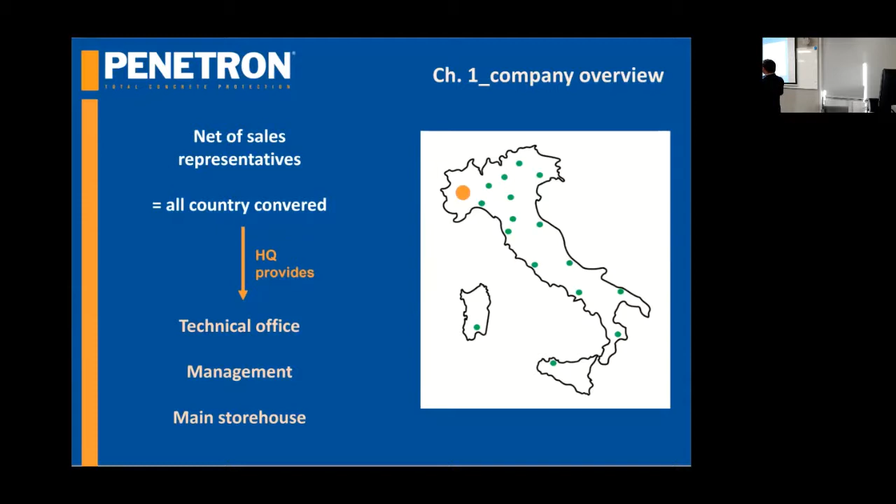Our mission is to provide solutions for concrete, concerning both waterproofing and increasing building life cycle. Our main customers, so you can focus a bit on the market, are building companies, concrete plants, and engineering studios.

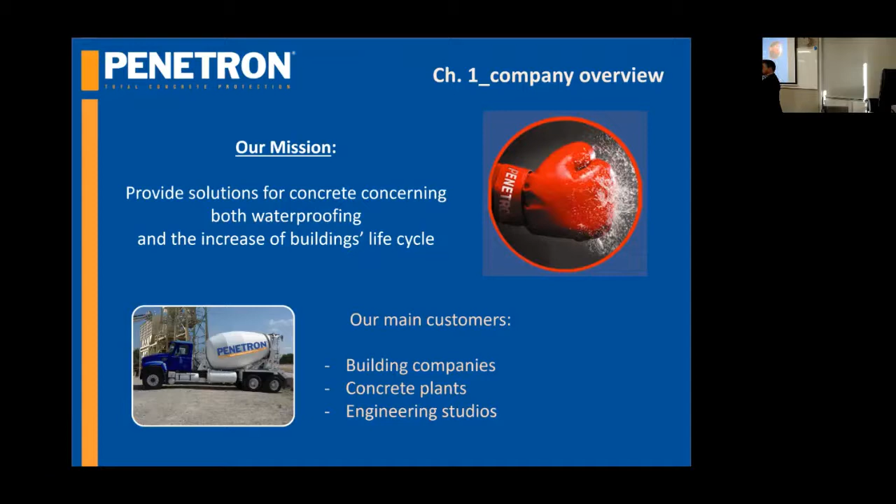This is something I want to put my attention on. I want to ask you to stop thinking as researchers and just take it as a joke - imagine that you are one of my customers: building companies, concrete plants, and engineering studios. To better understand what I'm explaining, it's important to focus on what these companies think about when considering using a new material, a new application.

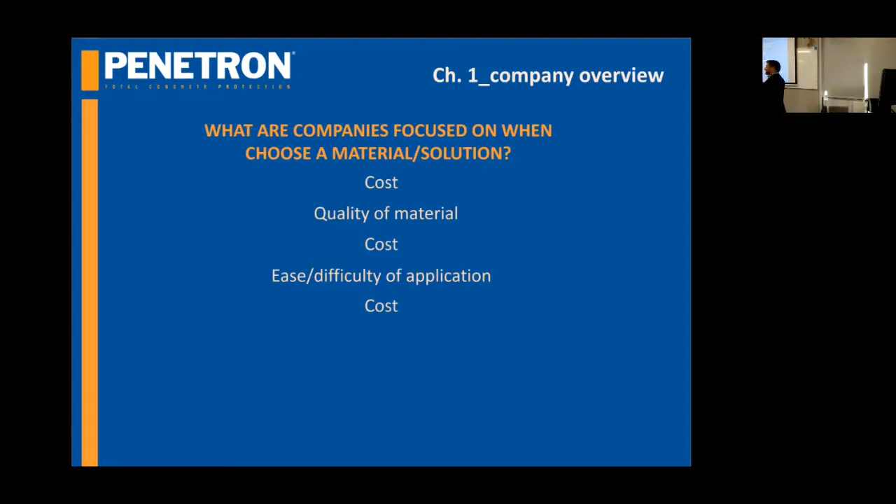They think about cost, of course, and the quality of material - if it could work properly, even the costs are important. The ease or difficulty of application, whether it requires special manpower or normal manpower, that means cost. The application time is very important, so for a company, for a concrete plant, time is a very important estimation, so it's also cost. The environmental impact, this is a sort of new way of thinking.

We are always thinking about companies, and companies are starting to approach the environmental impact of a product - that means cost too. This is just to let you feel how a product could be of superior quality, but still needs to face all of these values. You have to imagine that every company considers these things.

Chapter 2 is the Penetron Admix. I like to continue my overview because Penetron Admix is the most studied product we sell, and I want to explain it in a market view way.

The crystalline admixture appears as a powder, and its dosage is 1% of the cement for concrete, 3% for mortar. The package comes in bags or cans, and it's added directly at concrete plants.

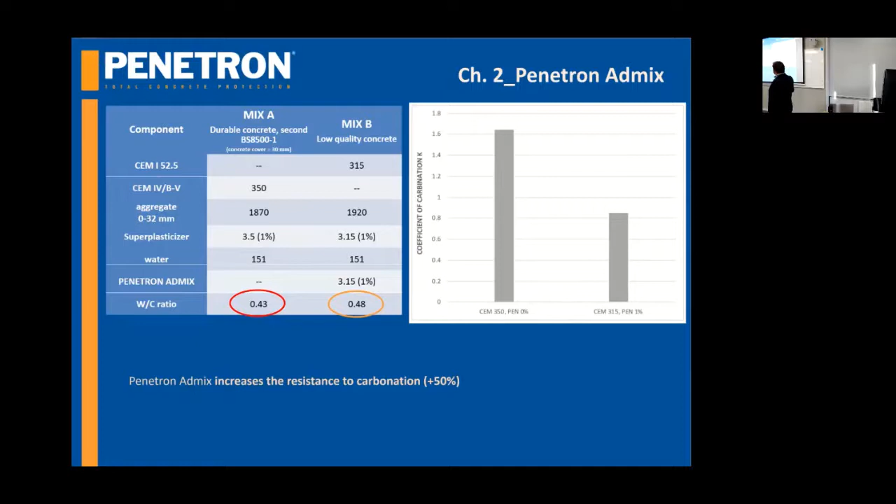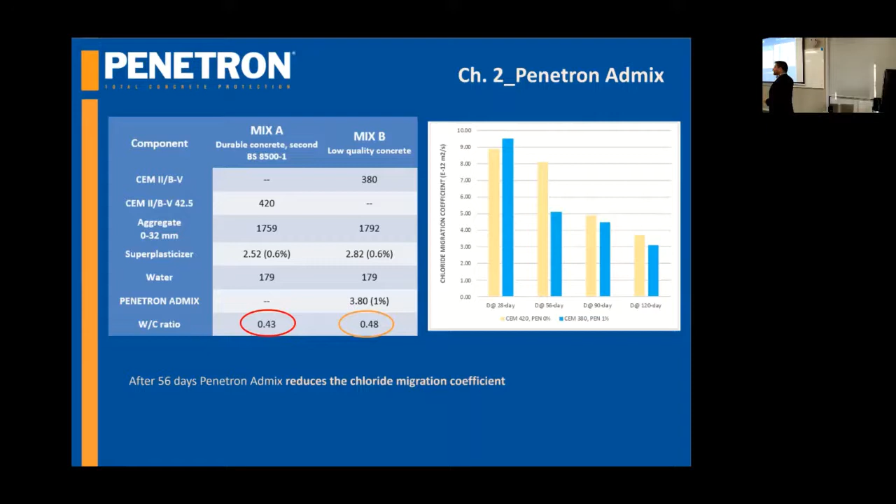A concrete with a higher water-cement ratio is considered worse compared with a concrete with a lower ratio, which has superior performance. For industries and companies, this is very important because you can use a mix design with apparently lower quality, and with Penetron Admix you can raise up the properties.

Penetron Admix has a lot of certifications concerning the quality of the product and also the environmental impact. This is very important because there are advantages if you use a product that is certified.

The white tank is Penetron Admix put in a typical working appliance. With the white tank, we make a step beyond the black tank. Black tank is all the systems that need to do something to cover and achieve waterproofing for the structure, for example a membrane. The white tank is another system based on using a crystalline admixture to make the concrete waterproof, but you have to add some accessories to prevent water from passing through the joints.

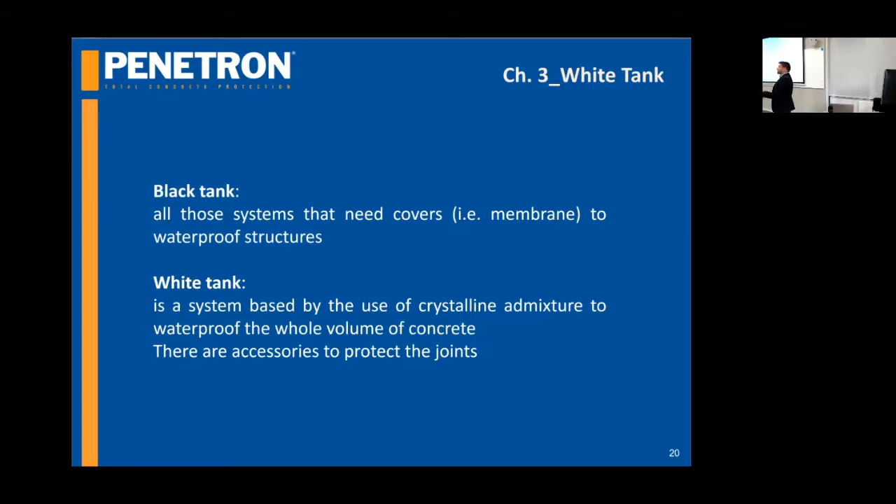The joints - I will explain just a few of them to make you better understand. The foundation wall joint is the first one. If we pour concrete on the foundation and on the walls with Penetron Admix, the concrete is waterproof, but we need to seal the joint between them. We use steel bars, steel plates with a water stop joint, either expansive, made of bentonite, and sealant.

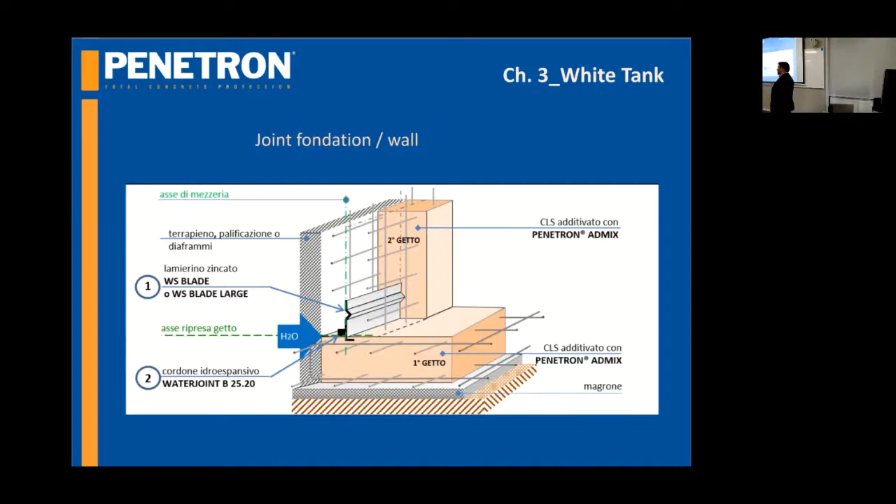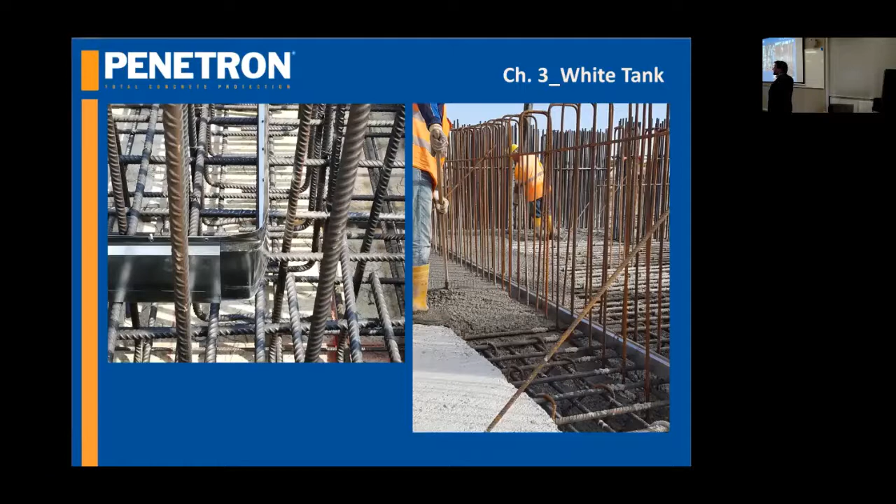This is a typical application. This is the steel plate directly on the embedded steel, and after pouring we get a result like this - a mechanical barrier that links the foundation with the wall. This green water is a tracer inside Penetron Admix, and it's one of the first ways to verify on site that Penetron Admix is used in the concrete. This is how the bentonite hydro-expansive cord is used.

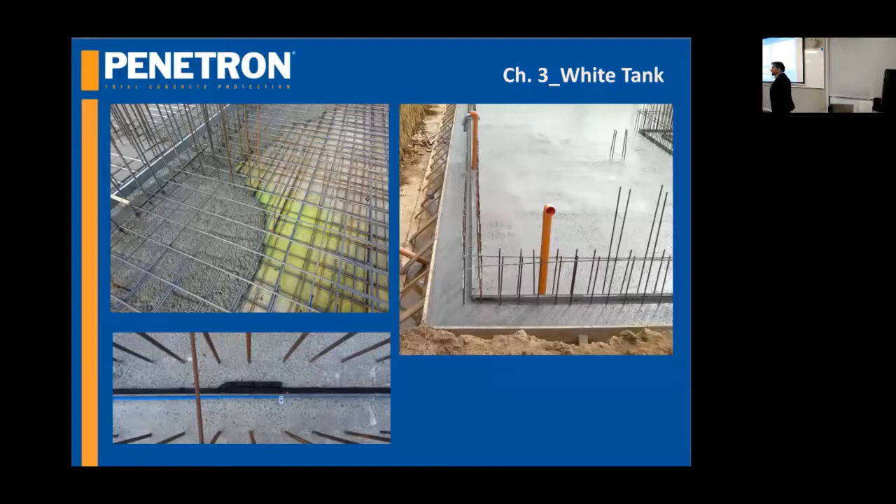Another important thing is to avoid concrete cracking. Well, concrete is prone to crack - it's one of its properties. What we do is let it crack where we want.

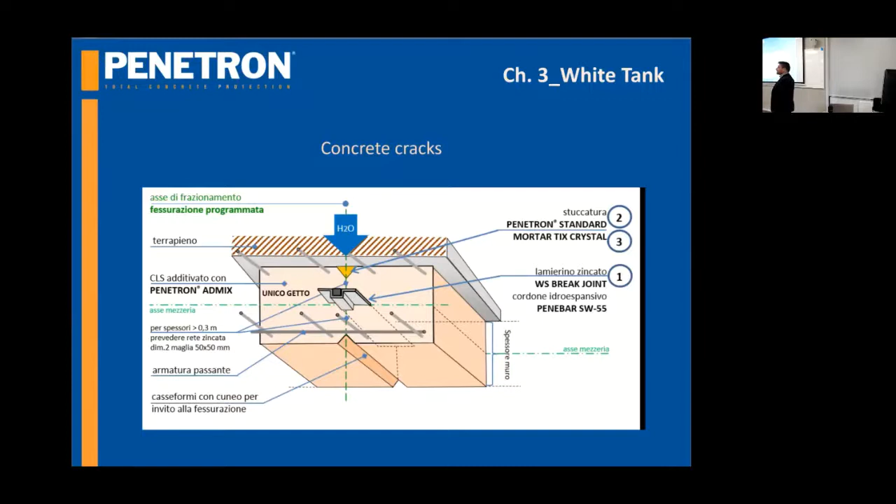So if we have a wall, we put a steel bar with the hydro-expansive material, and we make a small reduction of the wall's section, so that a crack will appear at this position, with the steel bar acting as a barrier. We can see it before pouring the concrete into the wall, and then inside we have a crack, a through-crack, but it's blocked by the steel bar, and then we close it with mortar for better security.

The same applies when we start pouring and then interrupt it to continue on another wall. There's a double steel plate, with half on the first pour and the other half on the second one. It's something like this - you can see this part has already been poured, and the other one not yet.

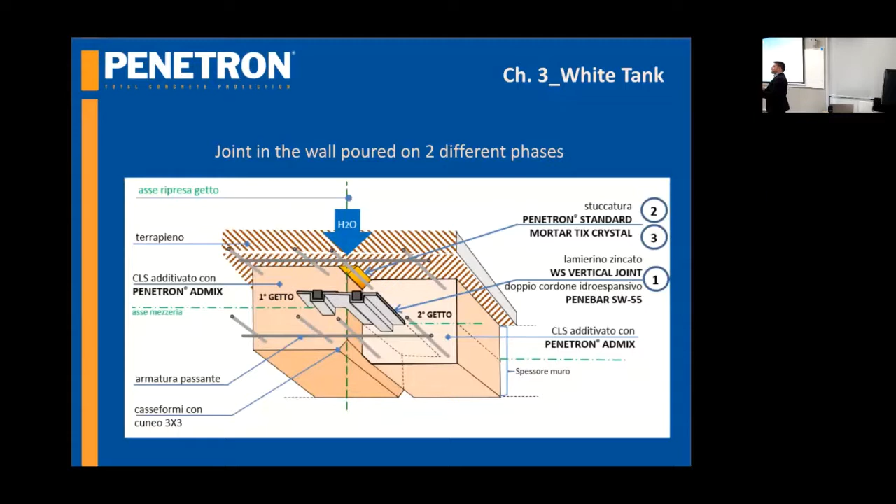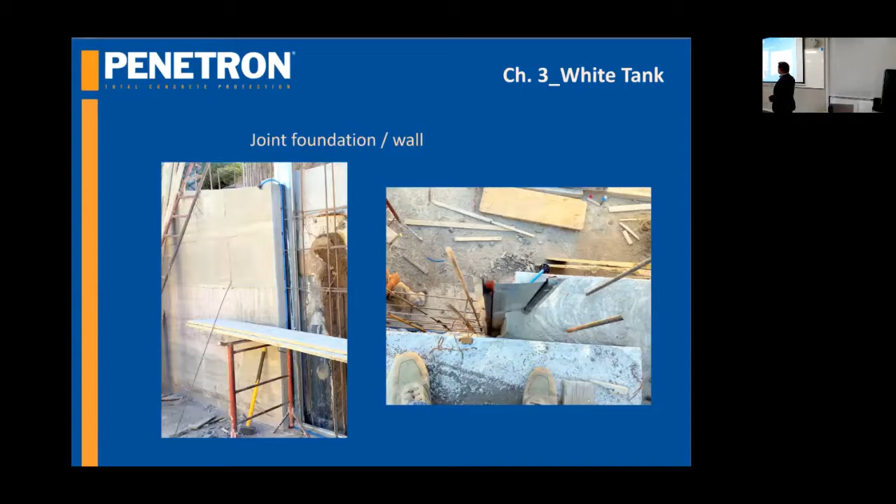These tubes are micro-cut with laser, and we get this shutter to be used in the future to inject polyurethane resin that expands and seals the joint.

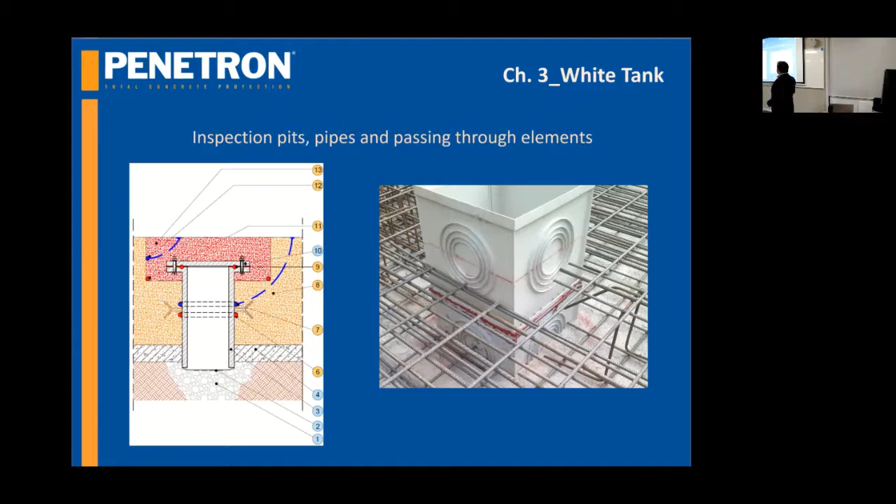Another important thing to deal with are inspection pits, pipes, or all elements passing through walls or foundations, because they create a direct link from the outside to the inside. We use a polyurethane hydro-expansive paste that expands with water, something like this. There are a lot of photos because I think photography better explains how things work on site.

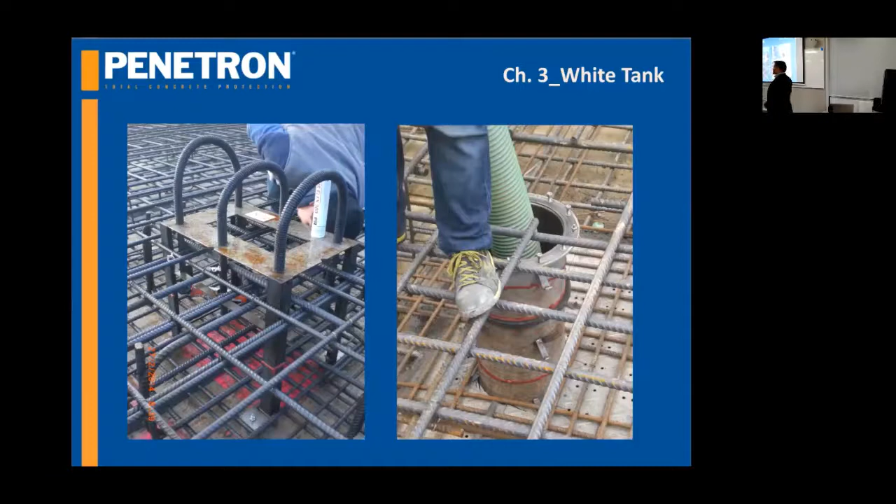So we need to imagine we are a drop of water - where can I pass? When you start closing all the ways, you can be sure you've done a good job. If you forget about something, you will have problems for sure.

Then we have a check with the mix design. We have an important relationship with concrete plants that provide their mix design to check if Penetron Admix could be applied, in what quantities, and about the dosage.

One of the main important things is on-site assistance, because we have to work with companies that are not accustomed to using our products, not used to using a white tank solution, since the traditional approach is something like a membrane.

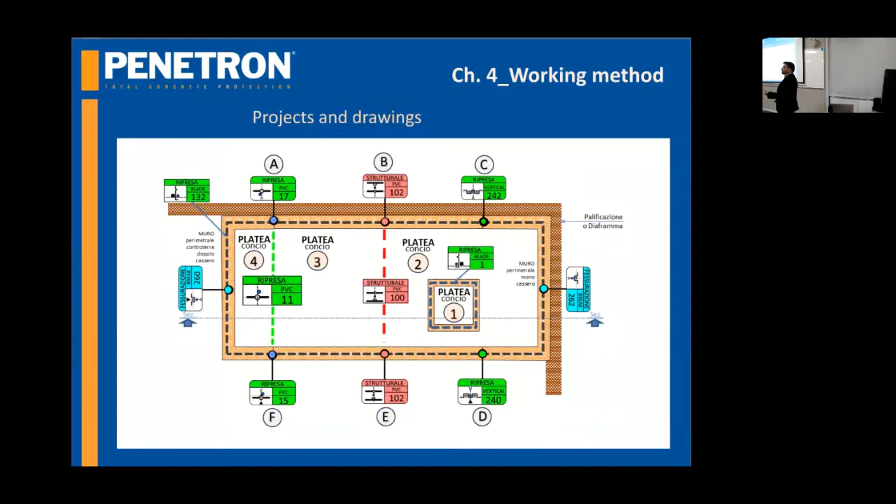Our projects and drawings are quite difficult at first sight, but it's very simple. There are some different positions for the joint I explained to you before, and we make it as a drawing on the section of plant, so that the final result is something like this.

We got a legend with all the positions of the steel bars and the joints, and it's everything reported on the drawing, so that on site this is very useful because color is quite easy to read, because a lot of time people on site don't spend so much time into this part.

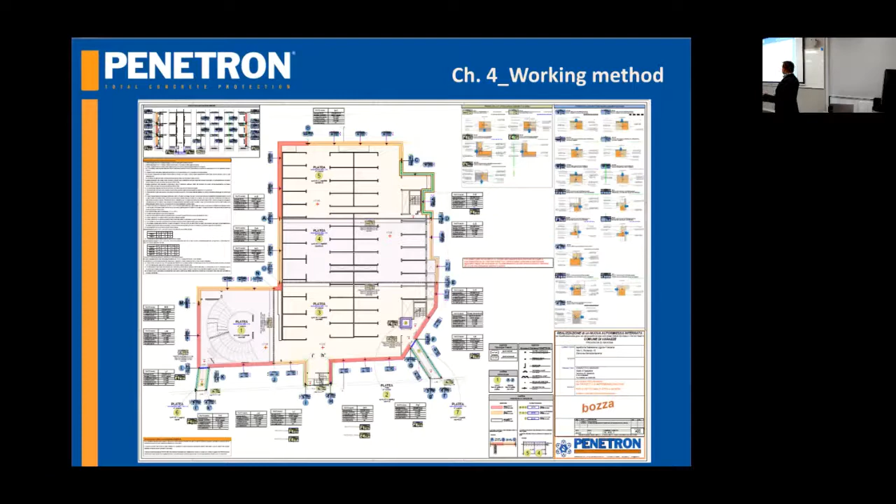So there is a role of on-site assistance to prevent errors and to make things run well. And if there are some problems or questions, they got a referee or someone to ask. But there is also this table that could be useful.

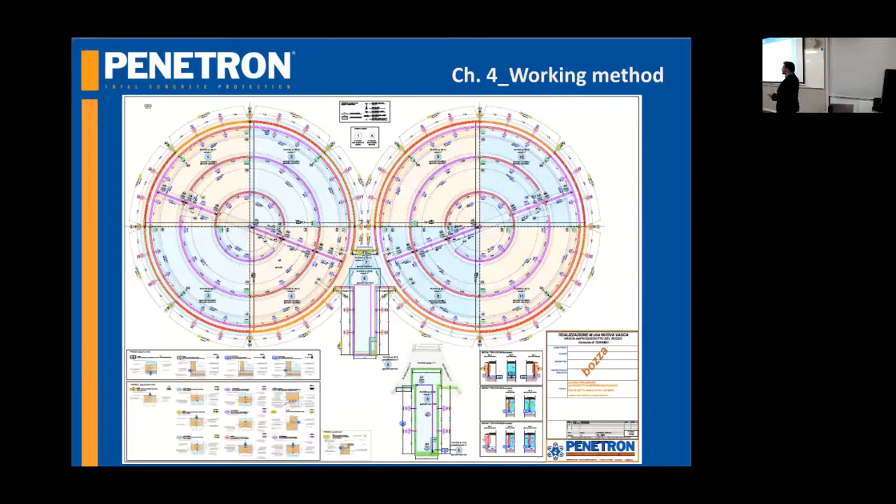This is a particular one. This is our wastewater plant, and it was quite complicated, but with these drawings it could be easier. We make also some specific details and particulars if needed, if they are required, and the on-site reports.

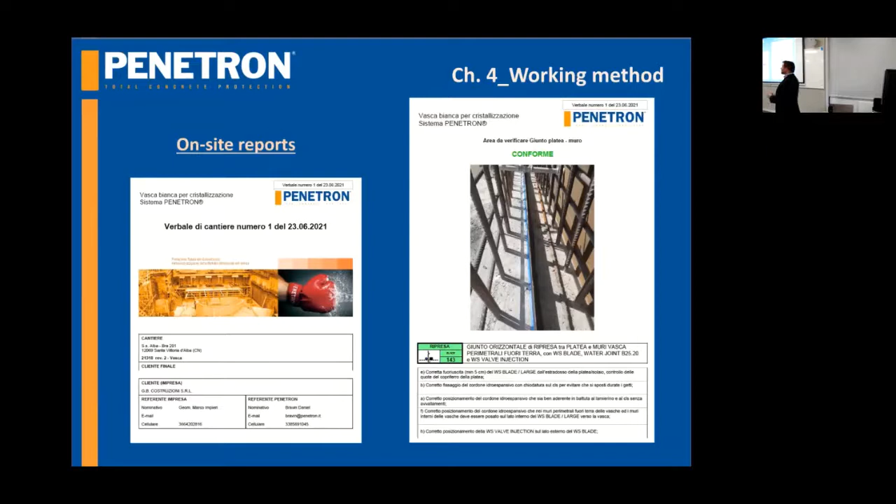The better way to make things go well is to have a good relationship with the building company. And the better way is to make reports, to check frequently how things are going, and to say it's okay, or if there's something that doesn't go well.

In this case, I don't know if it's something difficult, but these are bars on the foundation, and they are directly linked with the magrone. So they pass completely through the foundation. This was a big problem because water could pass through them.

So I checked them, I talked with the company, thinking of me not as a policeman or someone that has to check and control it, but something like an assistant, someone that could help with your responsibility. And they just put the hydro expansive band here, just to cover and to prevent water from passing through the foundation.

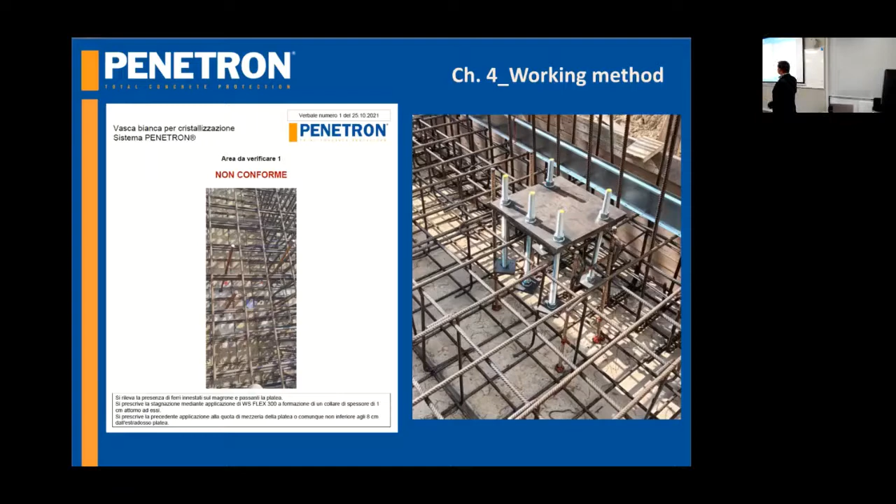Building: this is a tunnel track that links two buildings of Pirelli, the tire company. It is near Turin. This was a site with micropiles, and we were in the condition of aquifer. So there were well points that drain the water to let the company work safe and good.

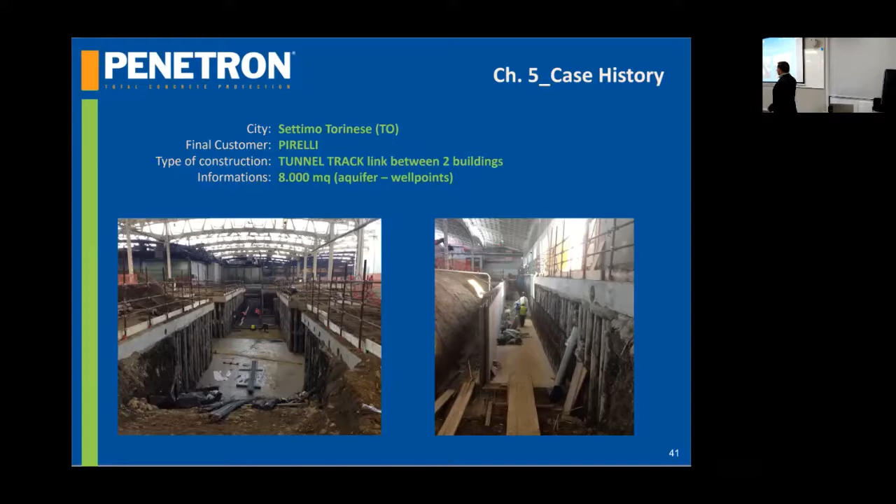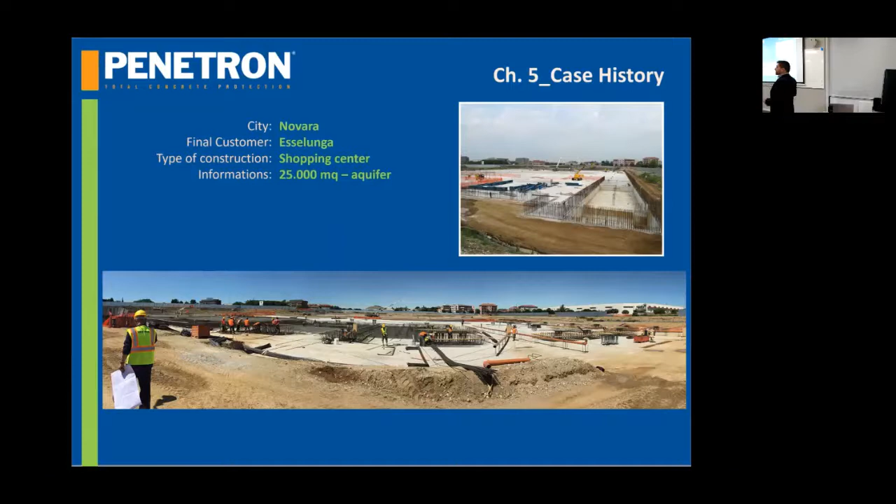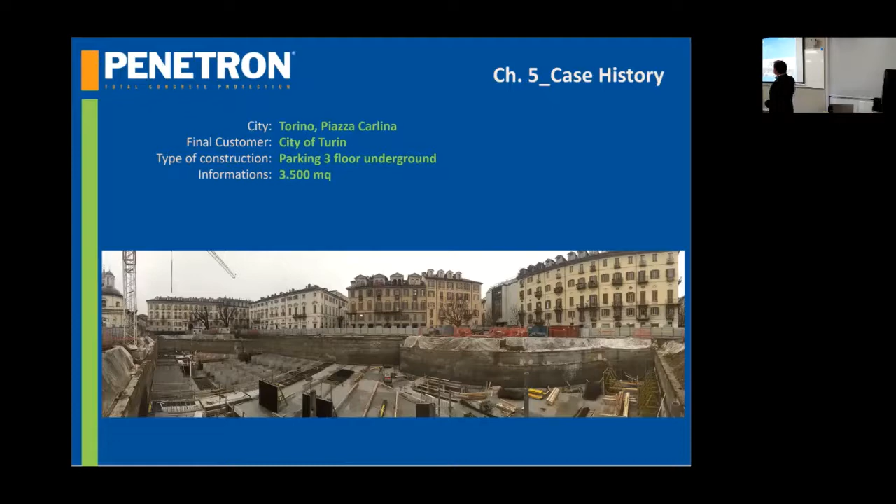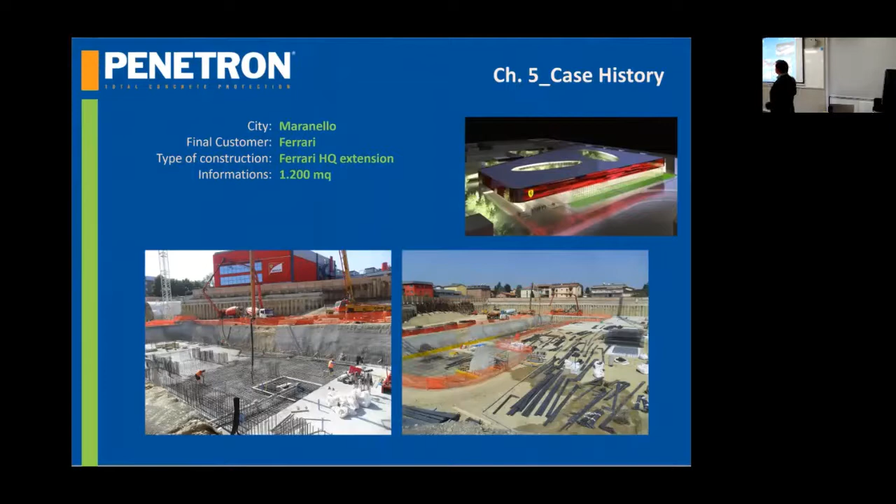With Penetron, there is not this difficulty, because it couldn't be damaged. It's inside the concrete.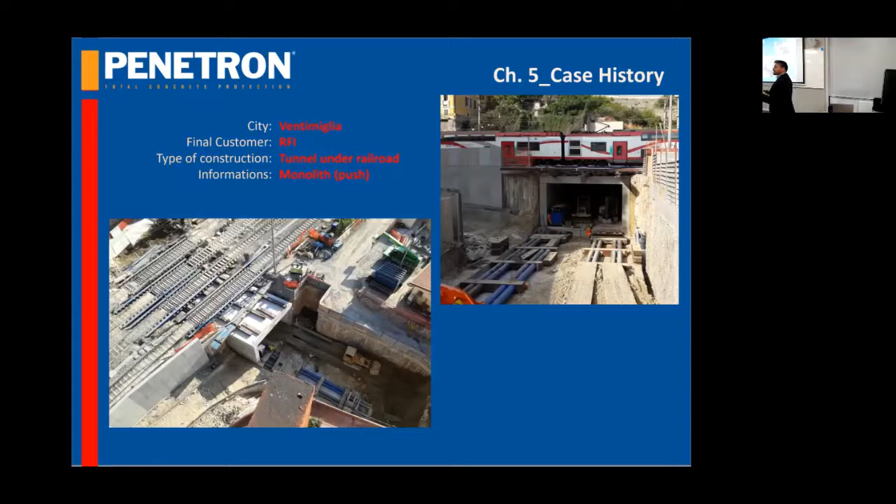This is one of my favorites. Unfortunately, it was not one of my customers. This is a neighbor in Ventimiglia.

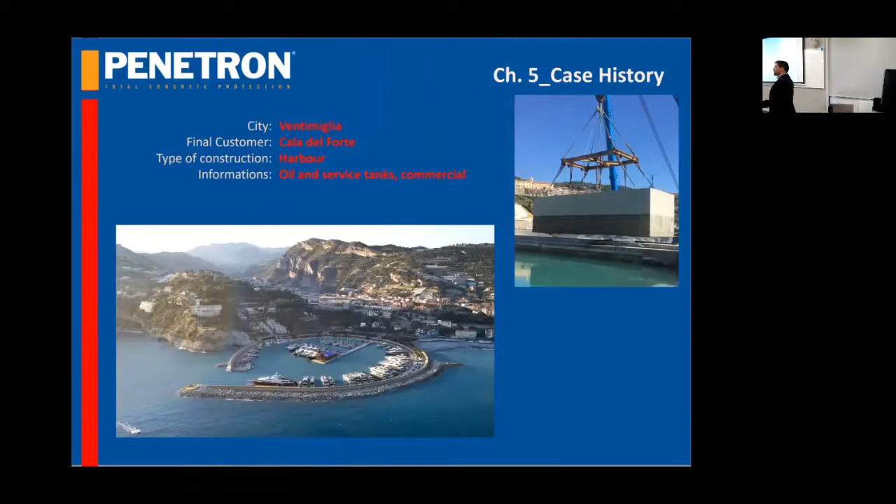Here we did some commercial buildings and some tanks needed for different services: oil, wastewater, not salt water. We built these tanks, and they will be placed directly in the sea. This is seawater, salty water, and this contained not salty water. So it was very important that the system works properly.

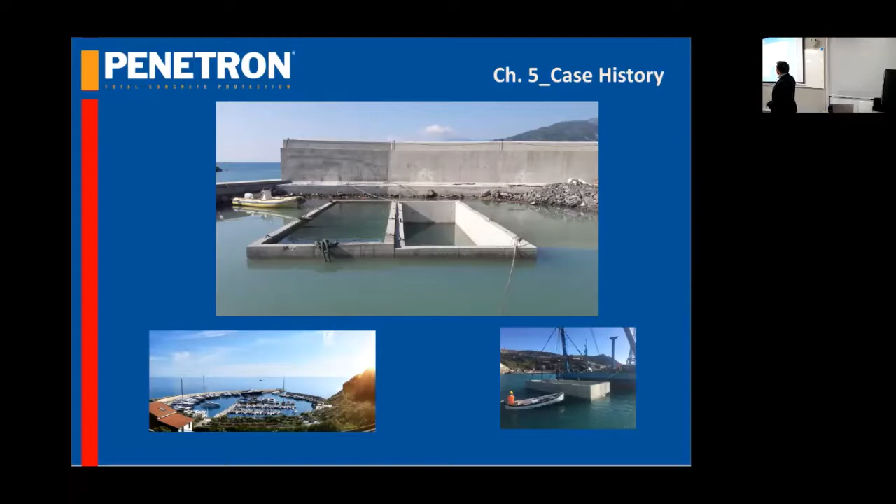There were some tanks with oil inside, some others with machines, and this is how Penetron works. I'm very proud of this work.

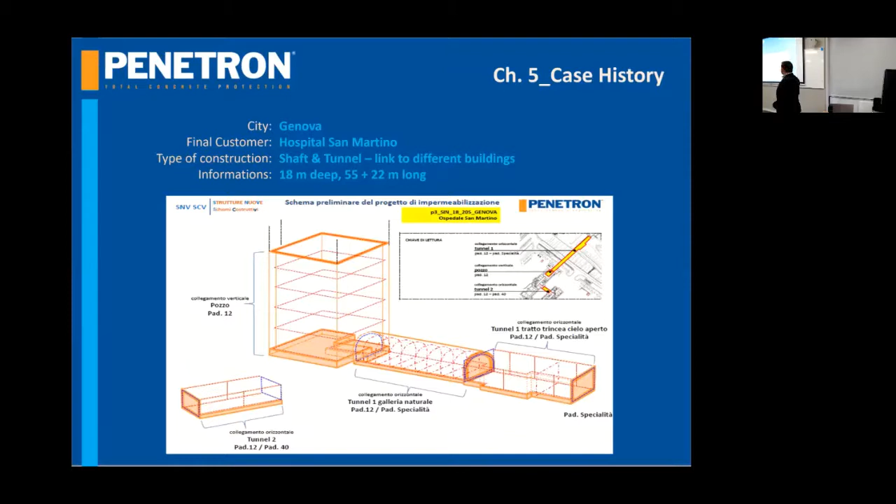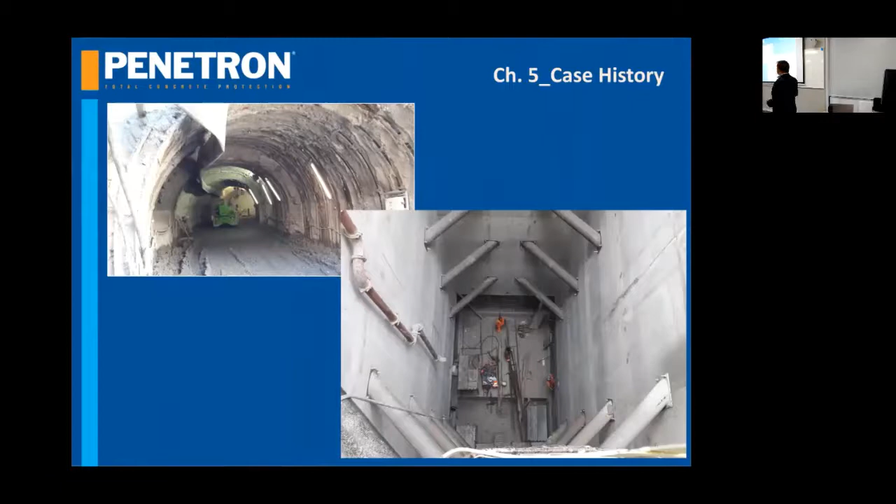For healthcare, this is an example of a shaft and tunnel that links the Hospital San Martino with some other buildings and areas of the hospital. It is a shaft of 18 meters, and two tunnels linking the structures, 55 and 22 meters long. We did this in this way, built top down, starting from the top and going step by step downside. It is a more difficult solution.

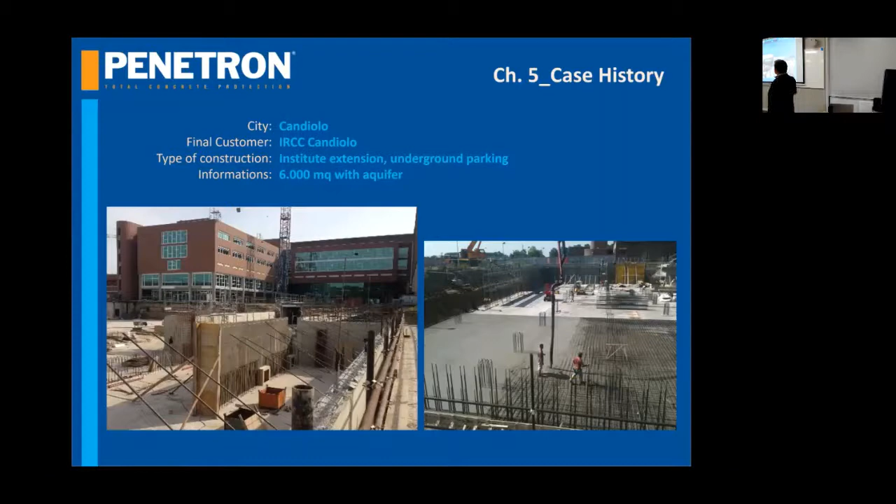This is another example for healthcare. This is IRCC, an institute for research and cure against cancer in Candiolo, near Turin. This was an extension of the research lab and the parkings. In this case, there is an aquifer, and the company decided on this project something like 8 years ago. Nowadays the company started a new extension and chose us again. So in these days, I'm visiting them to prevent against problems.

Another product is Penetron standard, and now we are going to approach the repair and the technology for infrastructure. Penetron Admix fundamentally is for new structures, while Penetron Admix is an admixture to be added to the concrete or to mortar. Penetron standard is a slurry to be applied on concrete, and it penetrates inside.

The more water there is, the more it reacts and it works. It's not a coating, it's not something you apply and if you remove it, it will still work. It will still work in the future if removed. Applying the slurry seals all the cracks up to 0.4 millimeters.

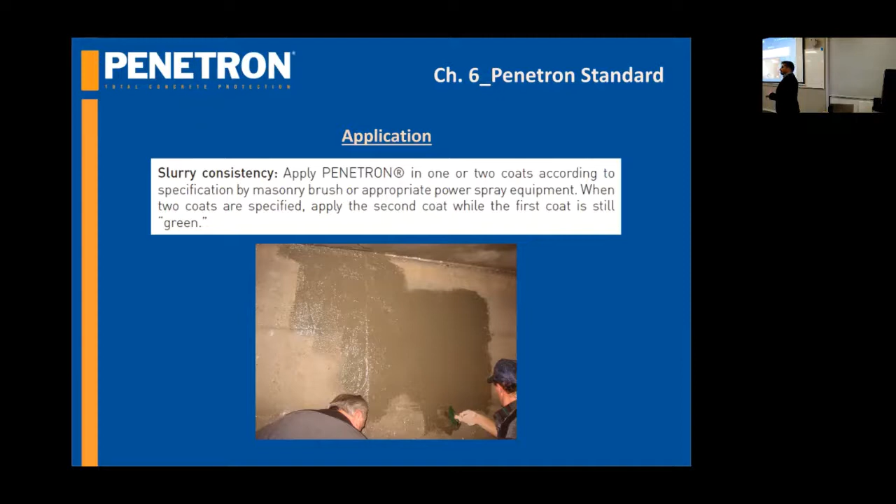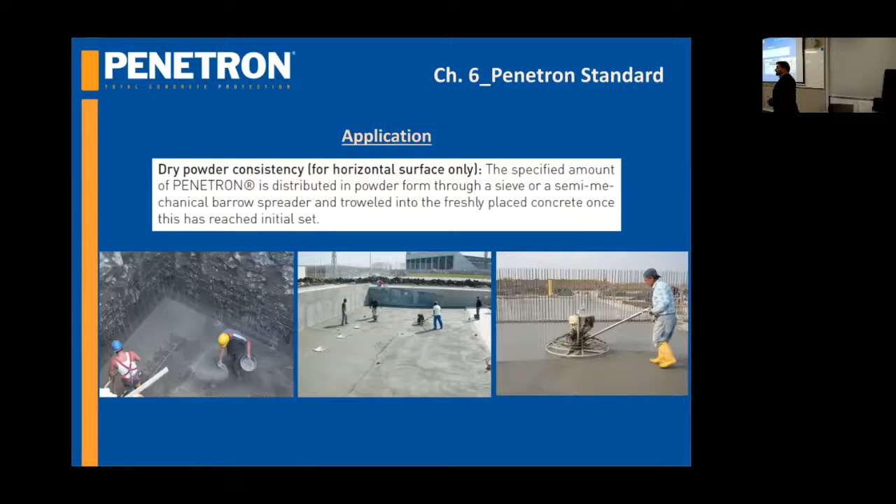There is another application for Penetron standard, for new concrete, only for horizontal surfaces, and it gives a sort of coating to protect concrete, for example against chemical aggressivity, chemical attack. But I will show you better.

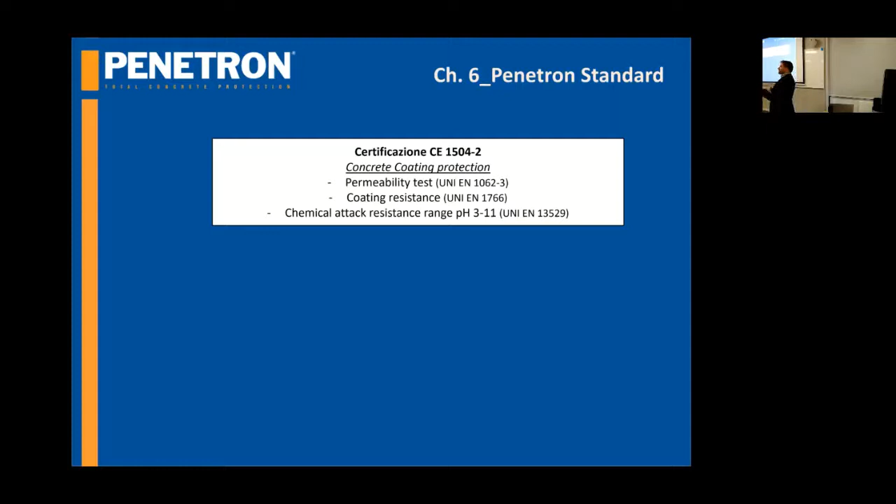A lot of certification concerns concrete coating protection, with permeability tests, coating resistance, and chemical attack resistance in a range of pH from 3 to 11. So for example, in a wastewater basin, where the water has an aggressive pH, this could be used to prevent the concrete from being damaged.

Another certification is for structural and non-structural repair: compression strength, adhesive bond, and carbonation resistance. The other certification concerns protection against corrosion of embedded steel, so protection against chloride and so forth.

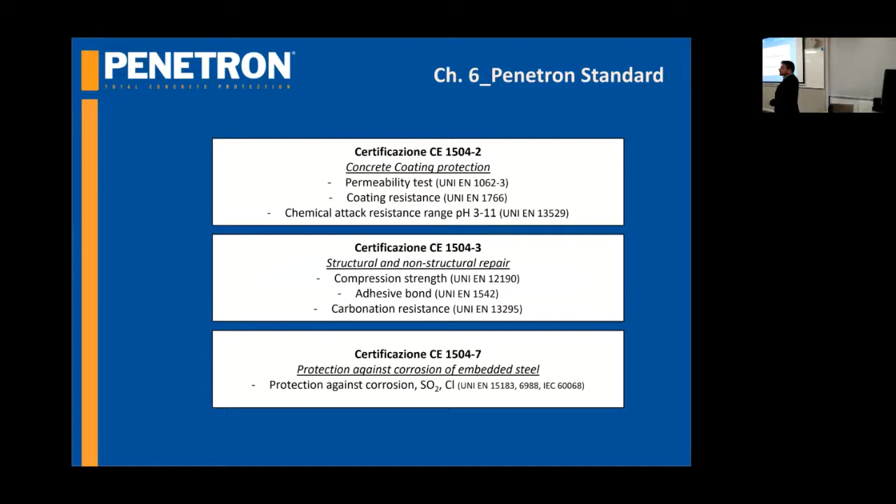Pull-off test. Why is this important? Because talking about the adhesive bond, one of the main problems when making a repair is to be sure that the mortar or material you are using can bond with all the support.

The pull-off test we did was a pH aggressive test, and we saw that after 28 days we got this value for different pH values, from acid to basic. After 90 days, the adhesive tension was higher. So the more time Penetron has to work, the stronger it becomes—the adhesive bondage is stronger.

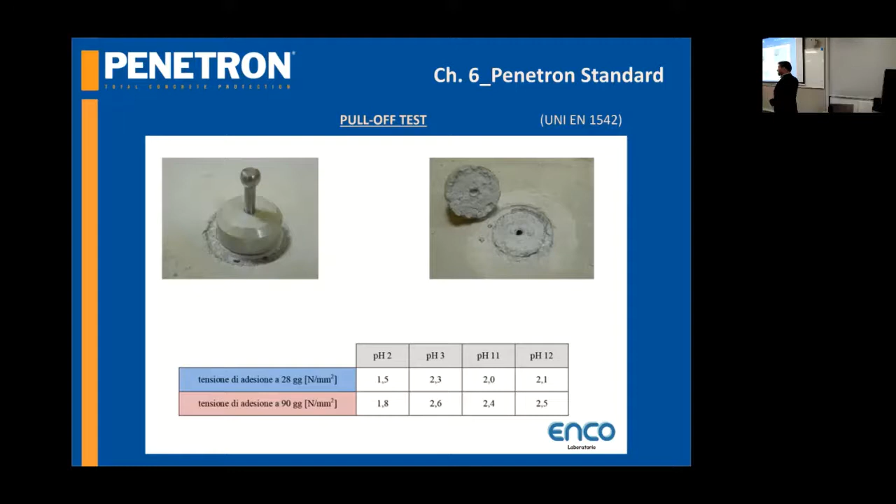Because of this, we use it as a primer. If I have to make a repair on concrete without Penetron, we use it as a layer to make a bond between the concrete and the mortar I'm using on the support of concrete.

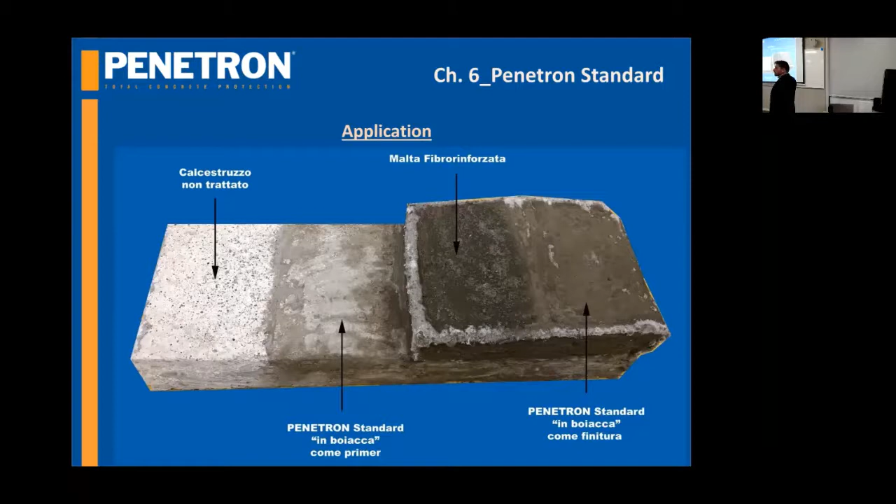This is a typical application of a repair. Here is an imperfection, could be a crack, could be a little vacuum. We have to remove it, clean it well, use Penetron standard as a primer, then apply a mortar, and again Penetron standard as a coating.

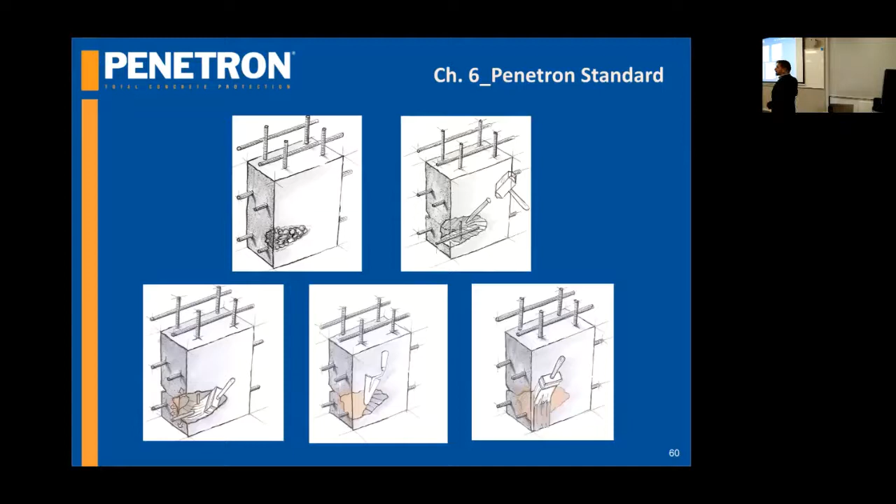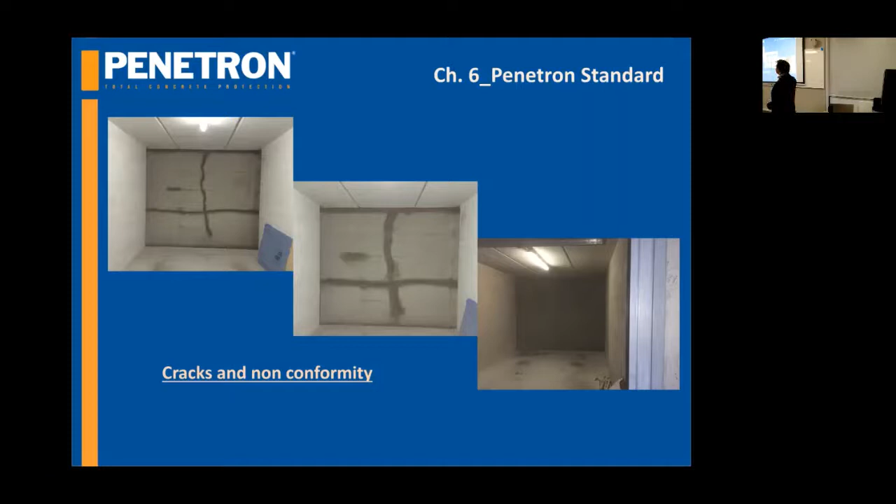These are typical applications. This is simply a box with a problem of water coming in from the outside. There was a crack and a little vacuum, and that has been sealed.

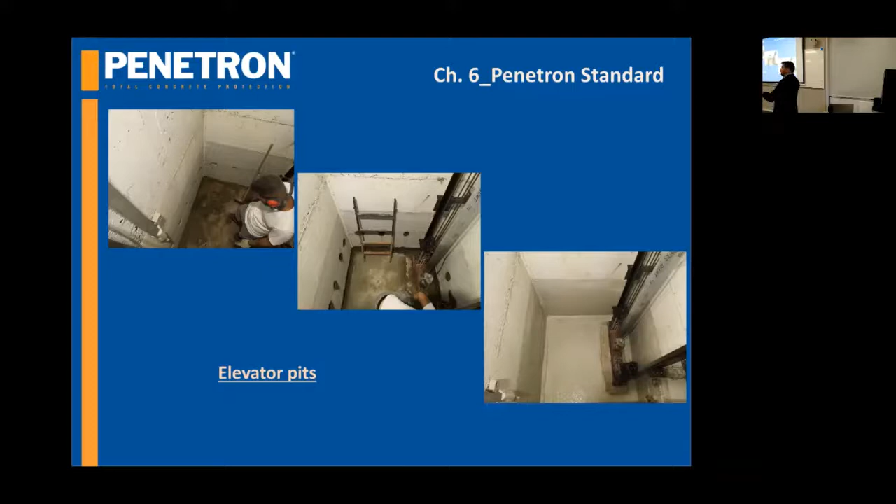This is an elevator pit. Elevator pits have a lot of problems because they're typically the lowest part of a building. If water found a way, water is lazy, it found the easiest way to pass. Elevator pits are something like a highway for water. In this case, it has been repaired, especially the joint between the foundation of the pit and the wall.

Another application is for canals.

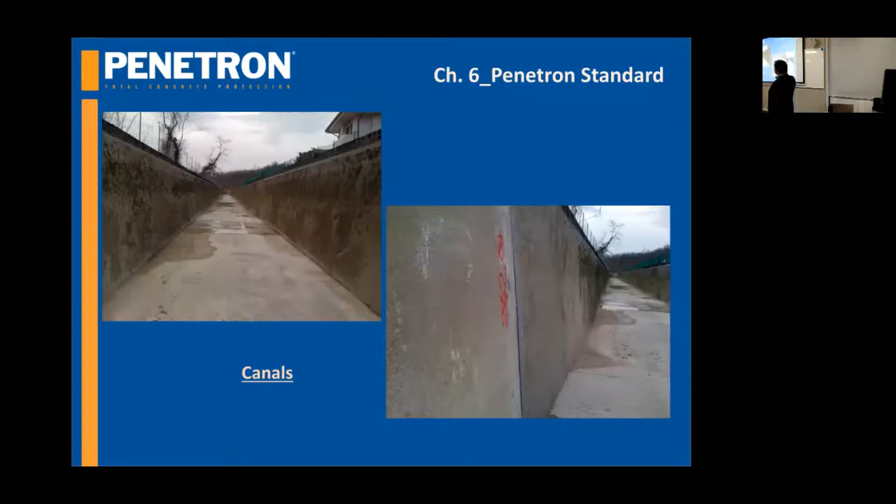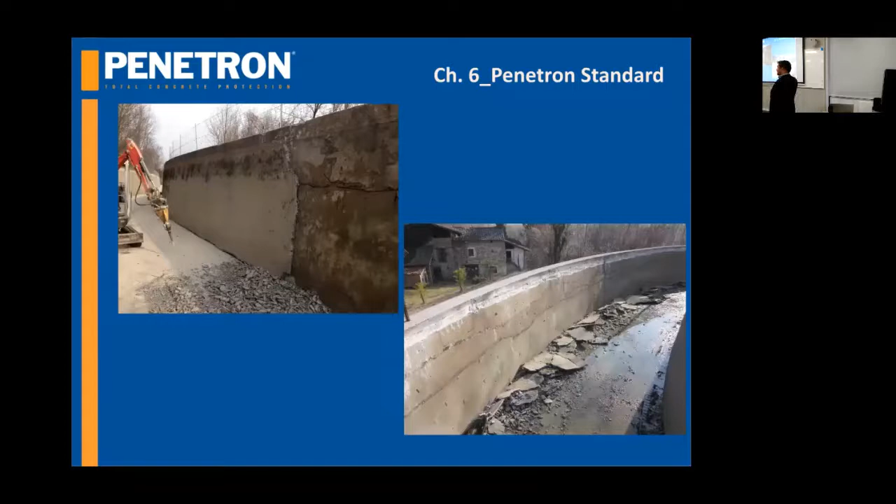In this case, the canals had an old coating that was damaged. First thing, remove it, and we have to reach the original concrete. After that, all the cracks were repaired, and the solution chosen was to use Penetron, not applied by brush because it was too expensive in terms of time. So we decided to spray it with a machine that could do this.

Here it is, the Penetron standard slurry applied with the painting machine. This is how Penetron started to react. Where you see the white parts is where Penetron is working. The more white it is, the more reaction it has started. This is the difference between before and after. This is quite typical after 8 years.

An important thing concerning canals is that the Penetron standard used as a coating is very, very smooth. So if I'm the owner of a canal, I want to reach two conditions: that water wouldn't be lost during the way, and that water runs as fast as possible, because I have to produce electricity. With Penetron, we can prevent both of these issues.

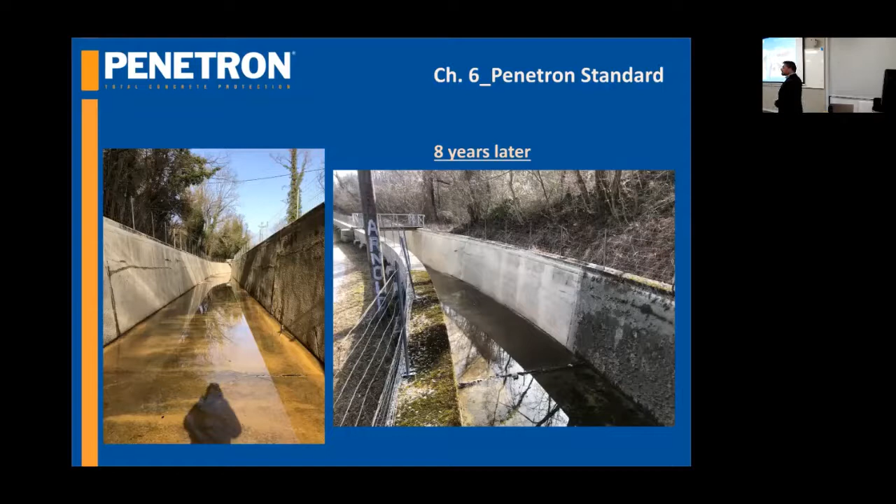Because the concrete becomes waterproof, and the smoothness is granted and reached. This is also important because there are no plants growing that are typical. You can see moss and other organisms growing on the side of the canal, which this prevents.

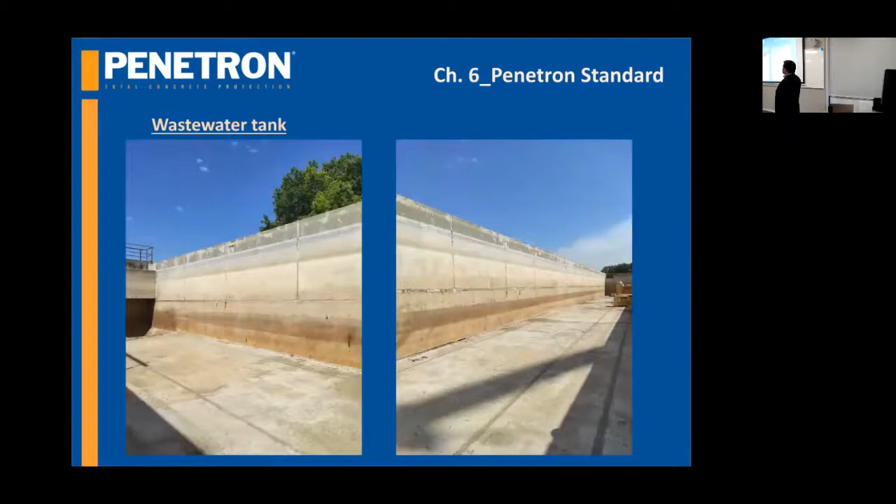This is an example for a wastewater tank. It is in our wastewater plant, a purifying pipe plant. There are also problems about the embedded steel, problems concerning corrosion.

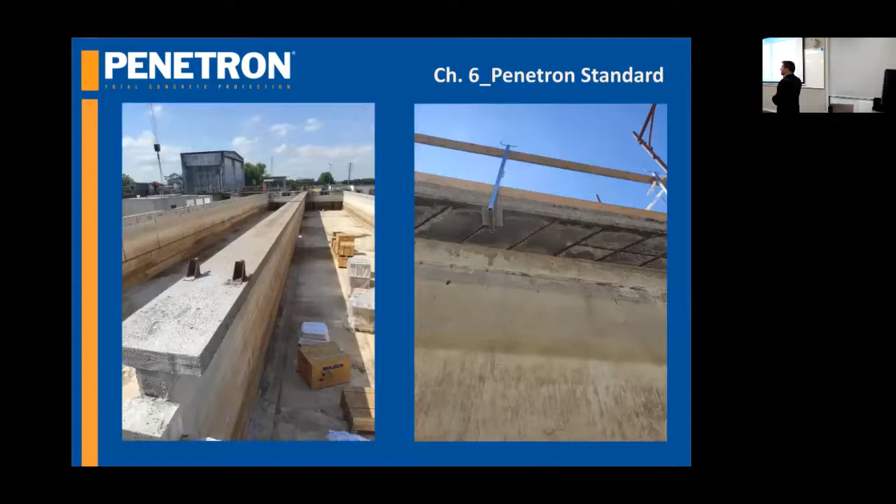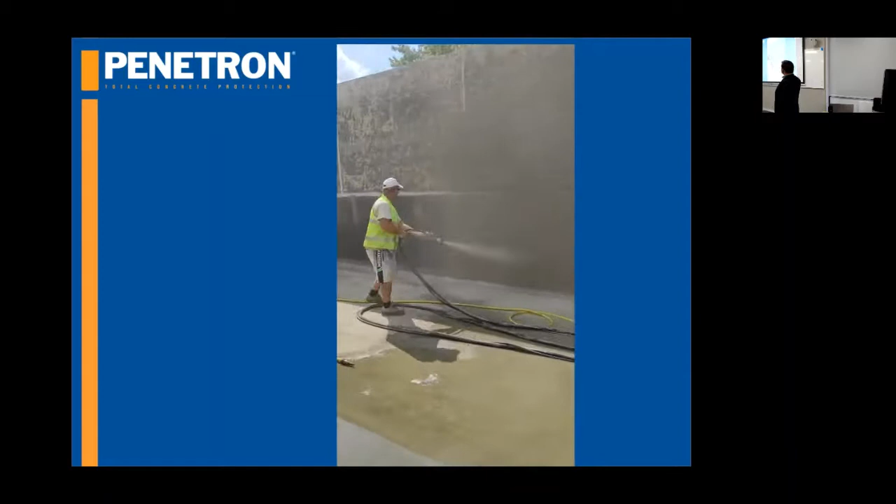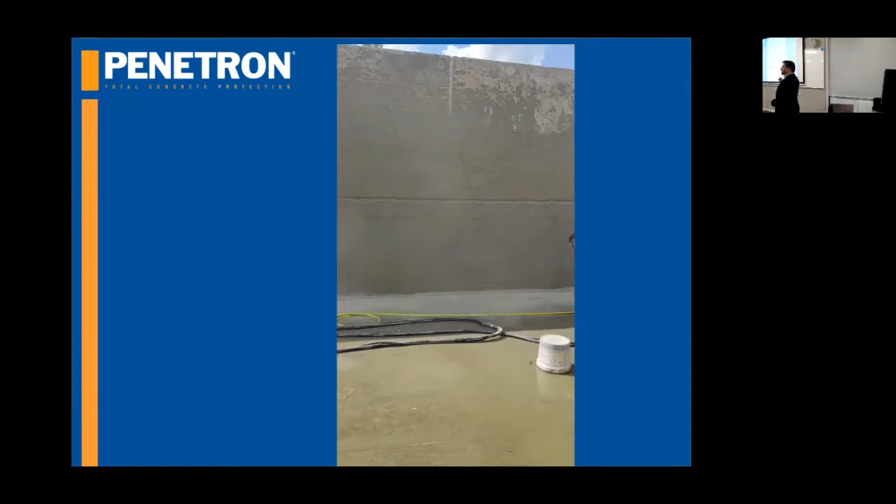These are joints that have been cured before, movement joints, because it's a very big tank. So we use an elastic paste, and then we could apply it. This is the result before and after, and this is how we repair the damaged part. You can see from this side, these are the continuation of the work.

Next chapter is concerned with Spritzbeton with Penetron Admix. Spritzbeton is an application very used in tunneling and in all conditions where you need to have a smooth surface for next workings, or maybe just to finish it.

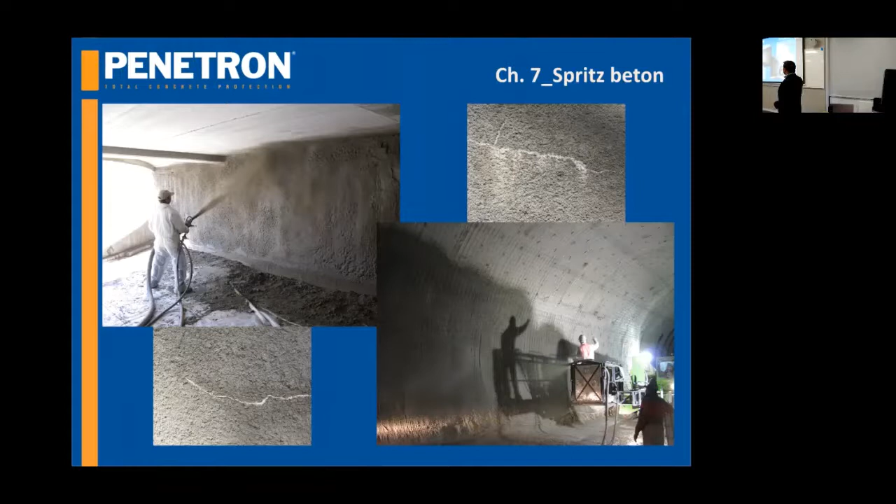For example, this is a gallery, the Paradiso site in Switzerland, and we decided to make some more tests on this site. We made a test with the concrete without Penetron, and we got a permeability of 26 millimeters. The same concrete with Penetron inside got a permeability of 17 millimeters. This means that it doesn't reach the embedded steel, and it's a very good result.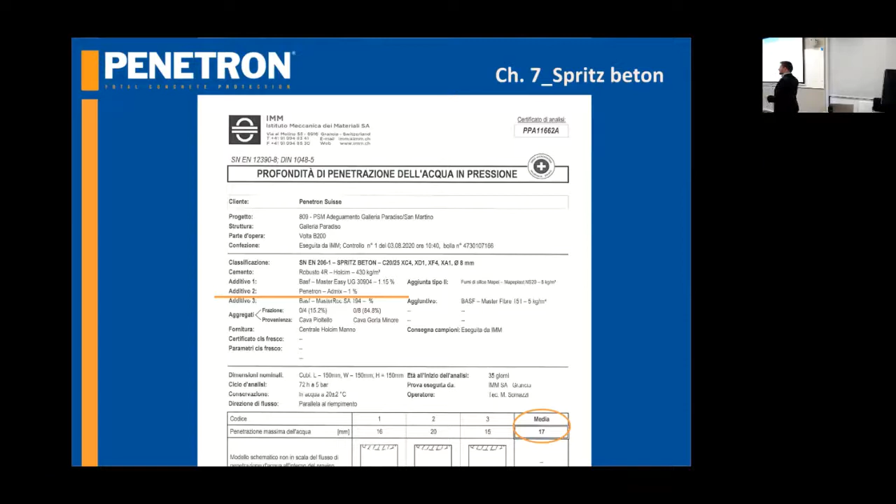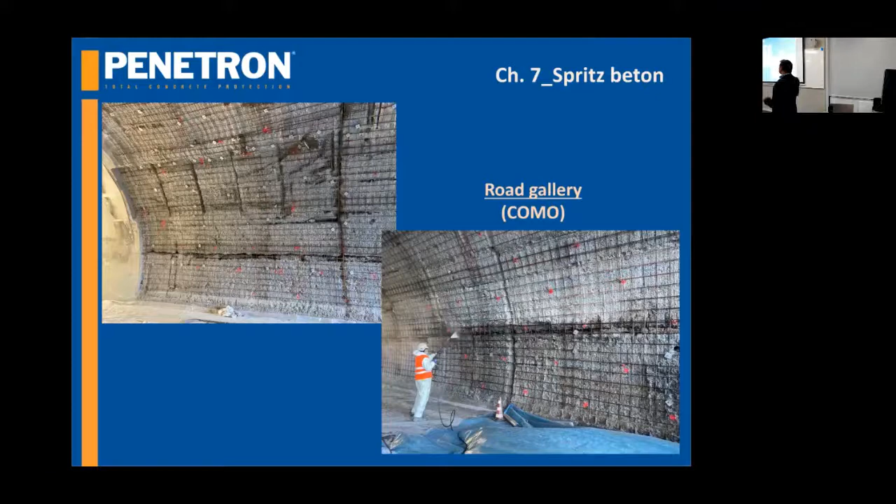This allowed lots of jobs, and in this road gallery site in Como, in the north part of Italy next to Switzerland, we used a combined technology, both with Penetron standard to prevent corrosion attacking the embedded steel, and spritz beton with Penetron Admix to cover the gallery. So first of all, we got the Penetron standard applied.

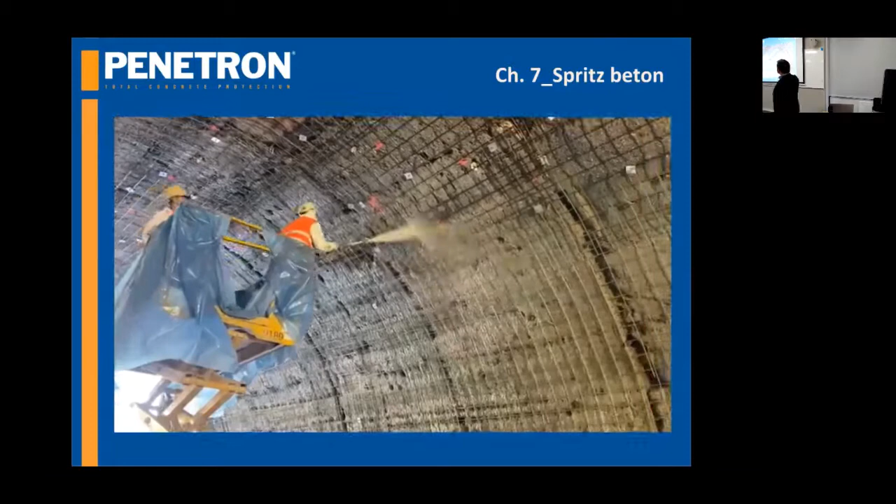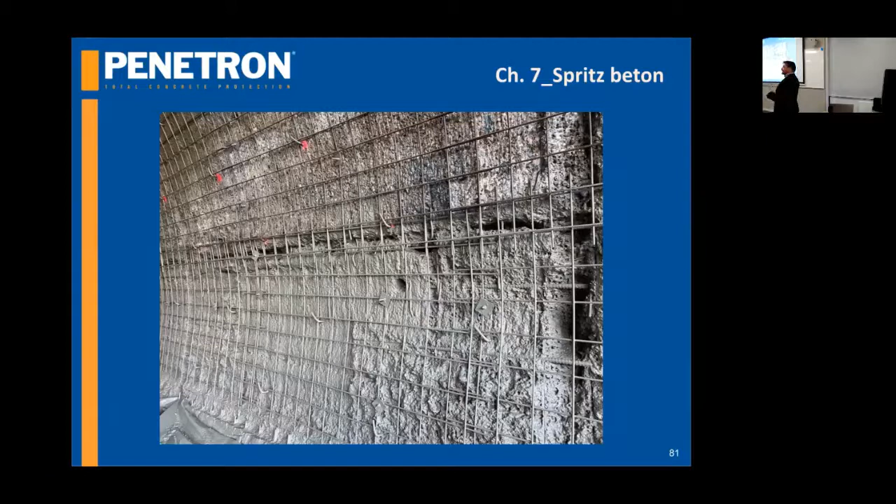Here is the video. You have to protect well because it is not good to be in it. And this allowed us to have this result. The embedded steel is protected, and the surface is ready for the bonding connection between the new Penetron spritz beton and the old concrete, and then spritz beton with Penetron is applied.

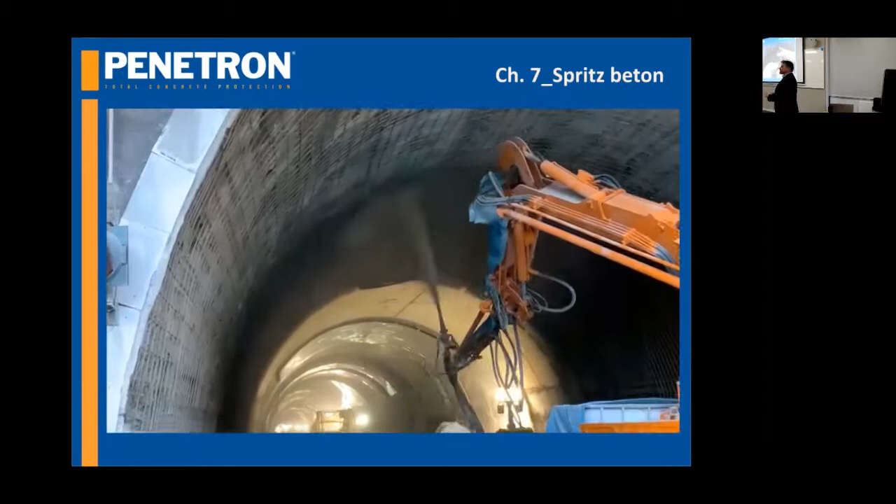This is a particular application, not an everyday solution, so it was nice to be seen. You can see also that there is little waste material. Typically, when you use spritz beton, you get a lot of waste material because some pieces fall down and it doesn't attach well. With Penetron Admix, we got very little waste material. This is another part of the application.

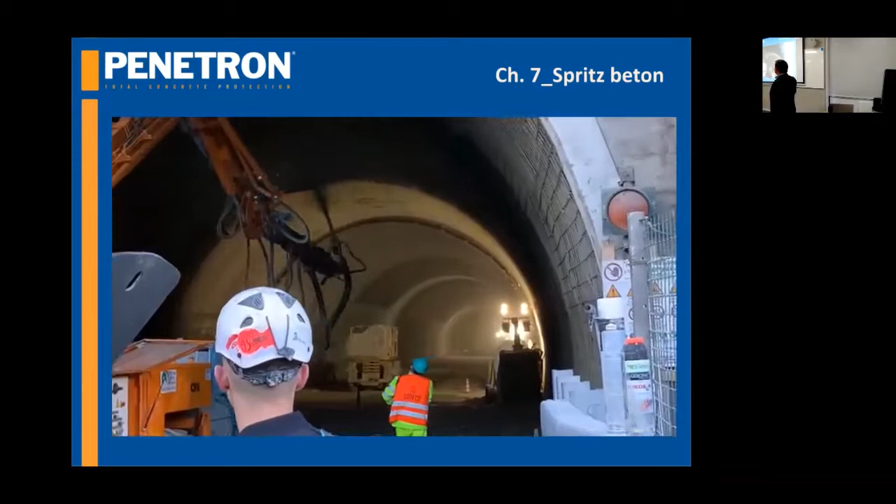Okay, what's next? Our plans for the future are surely bound with these projects, and these projects are linked with durability.

Self-healing technology - just to turn back to one of the first slides, a company is concerned with cost, with time, with the difficulty or ease of a material to be applied, and it's also concerned with durability, because if I have to build something, I don't want problems in the future. We want to help building companies furnish products that allow a long-term, long cycle life for buildings. And that's all.

Do you have any questions?

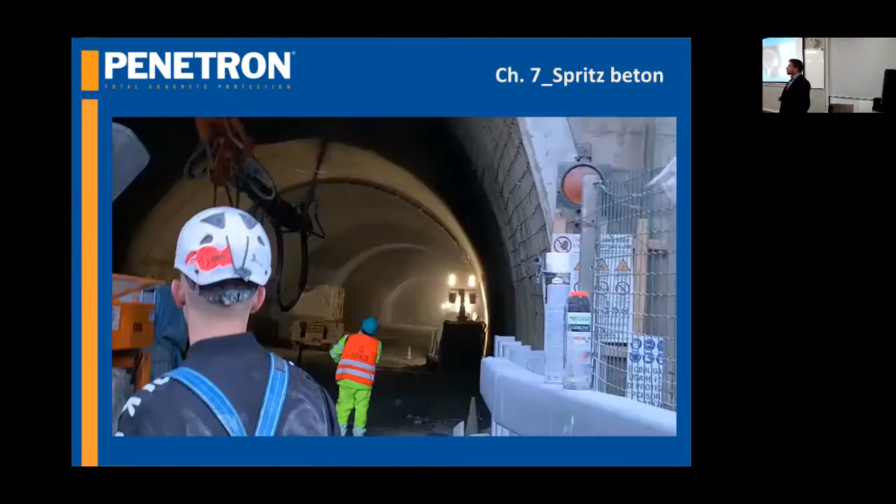We had a question from the chat, more of a comment actually. It would be good if you give us more data on water cement ratio, and on the other hand the different dose, and how these correlate together, like water cement ratio and the Penetron dose.

I'll take this one. The water cement ratio allows us to know what is the content of cement. The dosage still remains at 1% of the cement. Using a high water cement ratio with Penetron allows us to reach a better concrete that could resist better to permeability tests. So that's our way. I don't know if I answered completely your question.

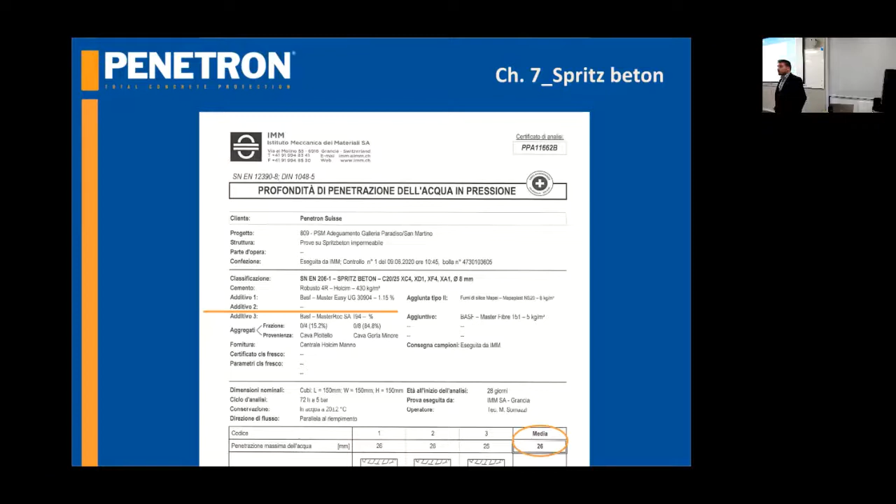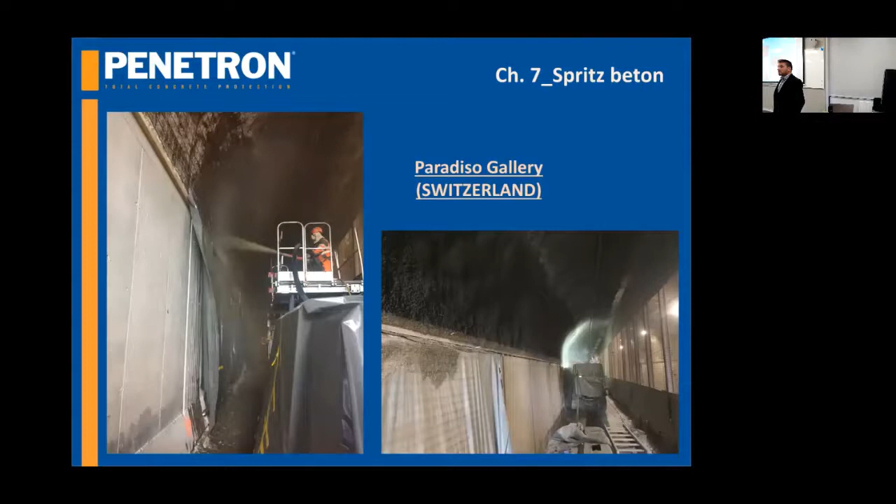More of a comment rather than a question. There's another question from the chat, similar to what we were just talking about. Do you have any recommendations for the maximum dosage of Penetron? The chat says they use a crystalline admixture for their experiments and it starts behaving like an accelerator at 4% dosage.

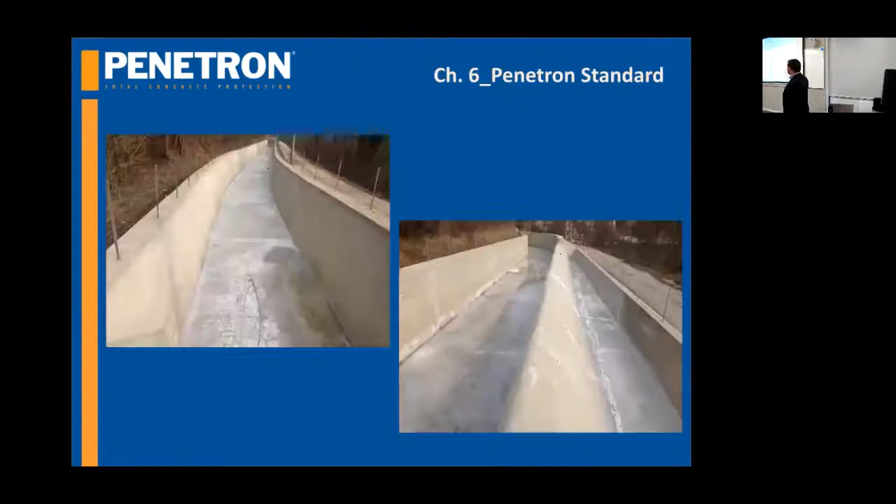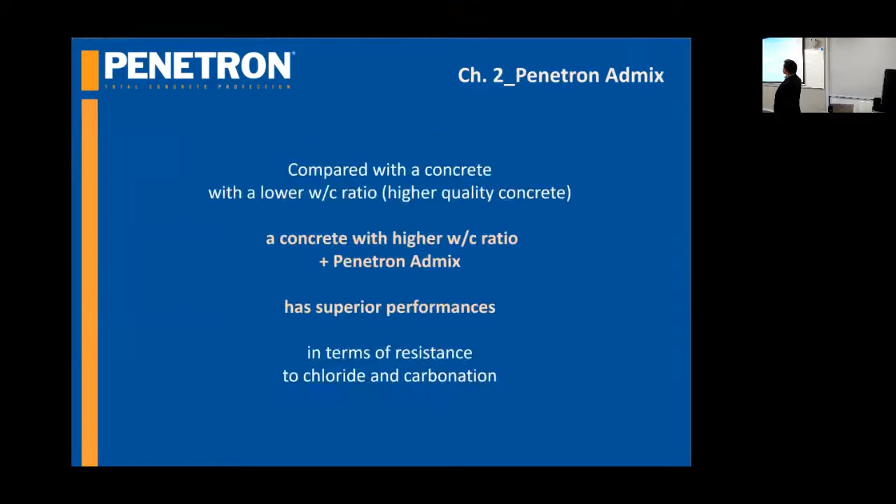I have to come back to the most important slide. Here we are. It's not recommended to use an overdosage, not because you're not allowed to, but because it's not needed. The increase of performance to use, for example, Penetron Admix at 2% in the concrete doesn't worth the advantage. There is a higher cost, you double the cost for the concrete, and it doesn't respect this value. So you don't have an overall increase of performance that could worth it.

Maybe Ari was next. Yes, thank you. I was also wondering about the water to cement ratio topic, but I think that's covered. I was also thinking, are there any incompatibility issues if you use this kind of mixture with different cement types, like Cement 1, Cement 3A, Cement 3B?

In fact, there are two different kinds of Penetron Admix. The Penetron Admix typical is used for Cement 1, 2A-LL, 2B-LL, and 3A. For other kinds of cement that contain pozzolana, there is a special Penetron Admix called Penetron Admix P, as in pozzolana, that can be combined and used for the other kind of cement. For the typical Penetron Admix, we require Portland cement.

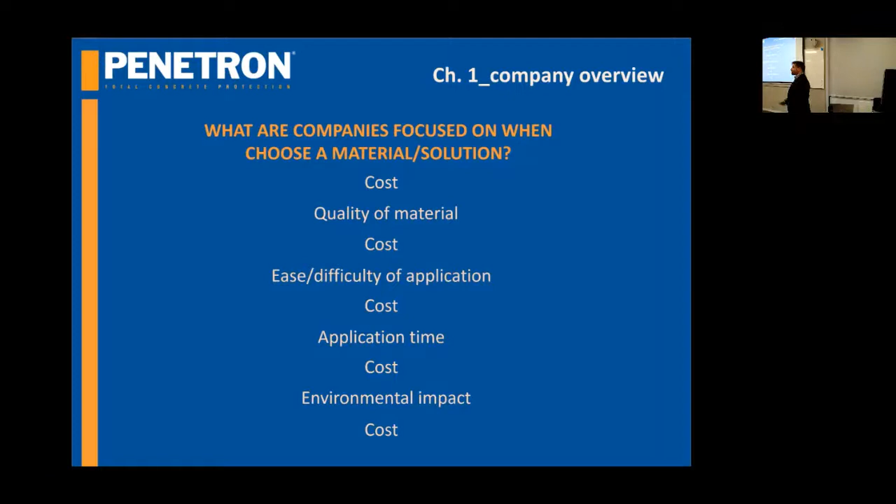Can you give more details about the test that was performed to measure water ingress? You're talking about this one? Yeah, like how actually did you perform the permeability test?

We had this test done at IMM, the Mechanical and Materials Institute site in Lugano, Switzerland. It is an international laboratory, one of the best, just to be certain that the test was done well. They ran the penetration test with this result. How exactly they did it, I don't know.

Oh, it's a standard test. The standard one, with water penetration under pressure, it's EN 15 something. The machine is standard, so you apply under pressure, 5 bars, for 72 hours, then you cut it and just measure the water penetration. 5 bars, I'm sure, and 72 hours, yeah, the standard conditions.

You explained that sometimes a customer forgets to use the crystalline admixture during the casting. Yes. In case of corrosion of reinforcement, which is better: using the crystalline admixture during casting mixed inside the concrete, or if a person forgets, just coating and covering it afterward?

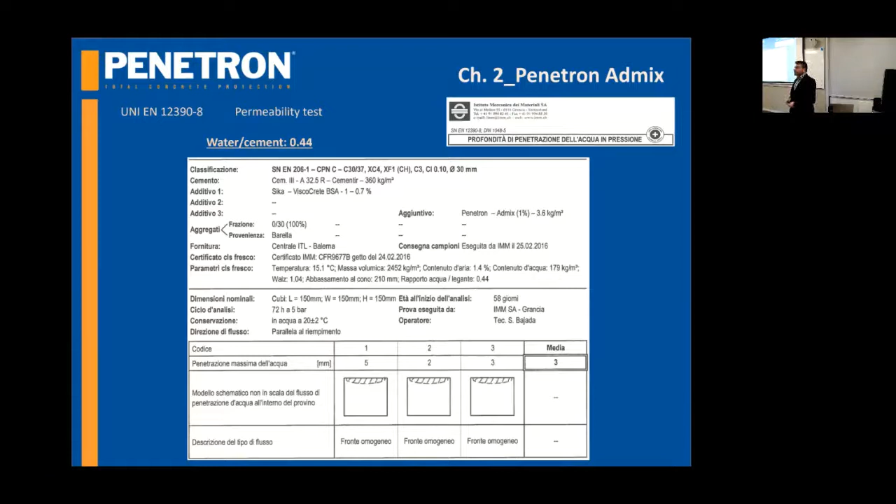Would it be suitable for injection purposes? Yes, it's not exactly Penetron standard, but there's another product called Penetron Inject. There are a lot of products, let me move to the vascular network section. For the vascular system, we use those blue tubes and inject, but it's not Penetron we inject, it's polyurethane resin. We use it because Penetron, even the Penetron slurry, is a cement-based product, so it's not used for structural joints that have movement, which could have problems if repaired with mortar and slurry. It's not suitable for them. For that kind of application, we have other products like tubes, vascular systems, and polyurethane resin.

Thinking as a customer, I have to be worried about the costs you mentioned, which are quite important. You highlighted that it's possible to improve concrete quality by adding Penetron Admix, using lower quality concrete. So my question is comparing one cubic meter of ordinary concrete for a certain purpose with one cubic meter of lower quality concrete but with the addition of Penetron Admix, what is the difference in terms of price?